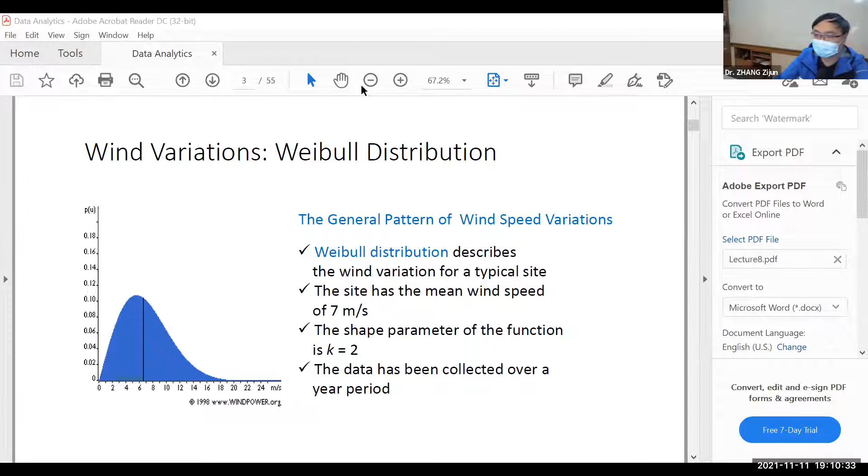Only paperwork allowed - what do you mean by paperwork? I bet you mean you will need to write down your answers on paper. Yeah, that's true. You will be given the answer book and you need to write down the solution. It's like what you have done in the past - the question paper will be dispatched and the answer book will be dispatched, and you need to write down the solutions on the answer book.

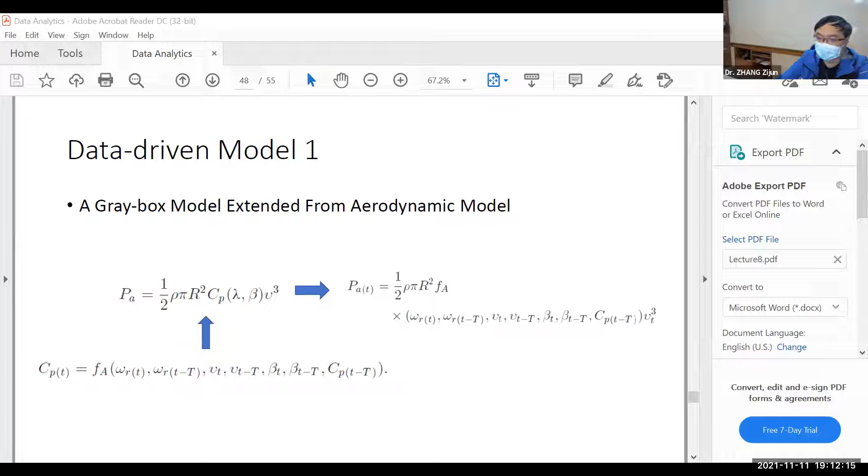Last time we stopped at using different machine learning tools to analyze the power curve, to do the power curve modeling. So we would like to incorporate such power curve modeling into the estimation of the power output of a wind power generation process.

We will see how the physics-based models gradually turn into physics-informed data-driven models and finally data-driven models. So the first one, on the left side, is the very classical aerodynamic model describing the wind power conversion process. Its components include a constant, rho which is air density, pi is 3.14, and R squared is the area swept by the wind turbine rotor, and this is the power coefficient, multiplied by the cube of the wind speed.

So this aerodynamic model is very clear. The only unclear part is the power coefficient, which is a non-parametric function describing the relationship between the power and the tip speed ratio, tip speeds, and also the blade pitch angle. So this one is not parametric, and we don't have its explicit form.

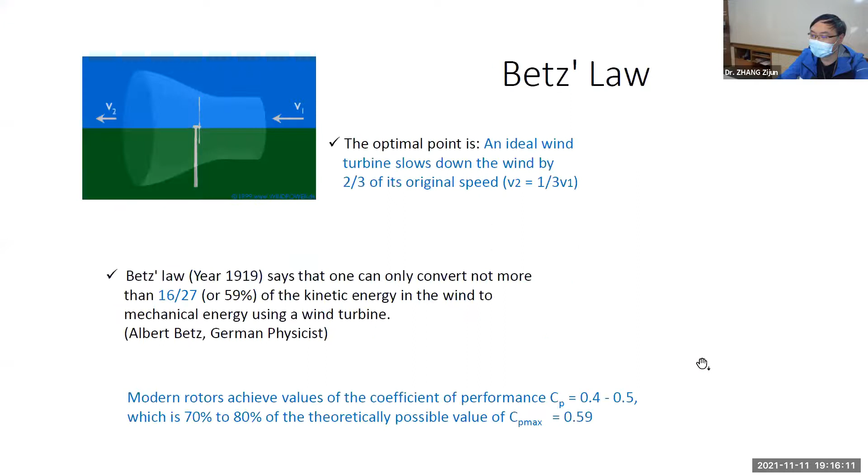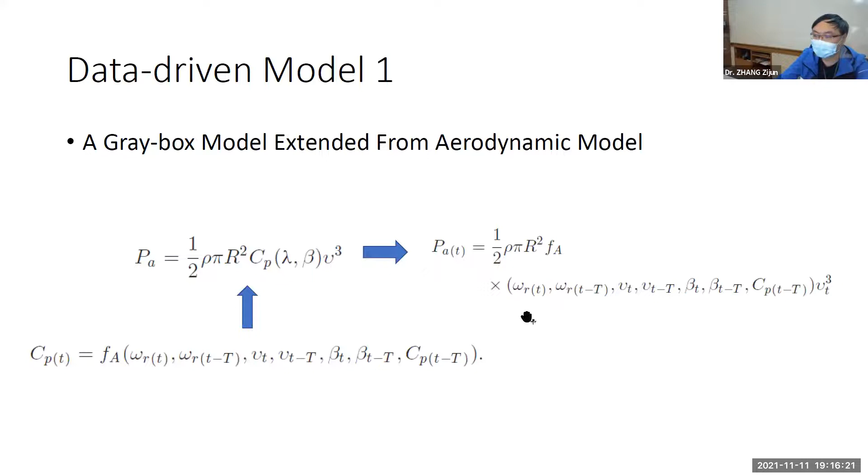So the uncertainty of wind speed we cannot control in the future, but according to the historical records, we can write down a Markov model to describe the state change of the wind speed over time. It can be converted to a static Markov chain.

It's expressed as a transition matrix of the wind speed, like after 60 seconds. So we will see that based on our data and statistical analytics, if the wind speed is at the low level, it is highly likely that it will stay at low level. And if it is at high level, it will highly likely stay at high level. But if it is in between, then you will find out its likelihood of staying at its own state will be decreased a little bit.

For example, if the wind speed jumps into the cut-in, higher than the cut-in state, it becomes 60% likely that it will stay at its previous state. Otherwise, other chances are like moving higher, or moving a little bit lower.

The most dynamic part is the wind speed at 7 to 8, 8 to 9, and 9 to 10 state, 10 to 11, 11 to 12. These states are very, very dynamic - they will have quick changes in the next time step.

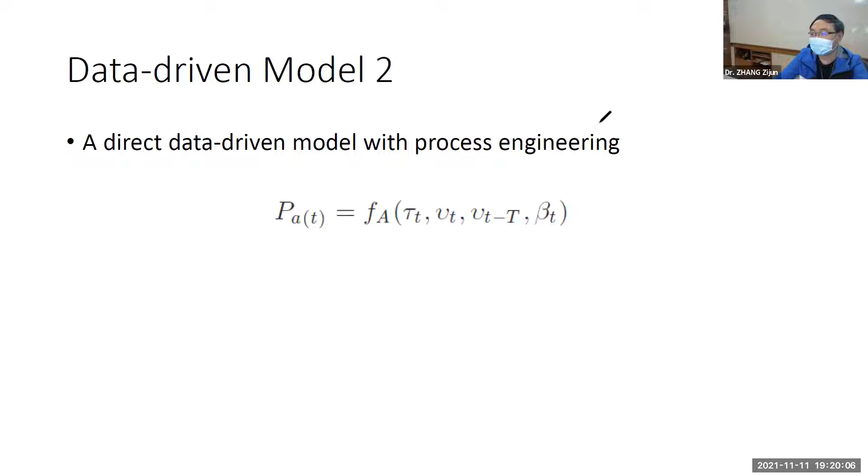If you have a power output PA with a function of T minus 1, then these historical outputs in terms of their relationship with the current power output indicate a kind of dynamic change. So this is dynamic, and a more complete model will include this, showing the dynamics of the system.

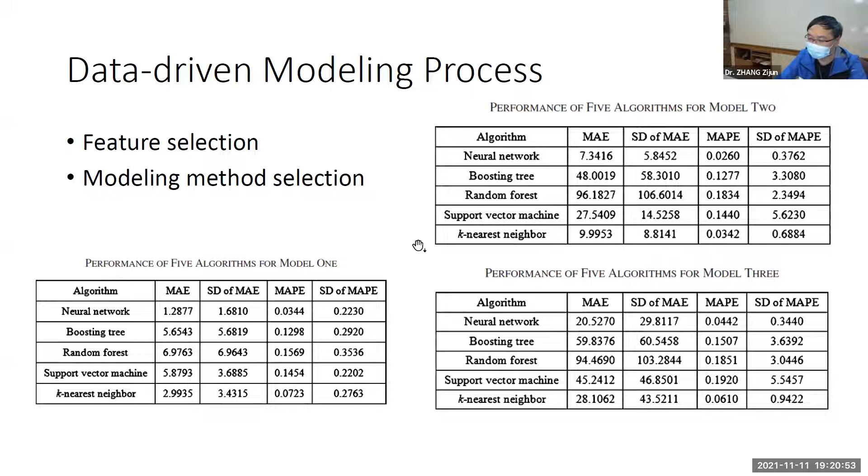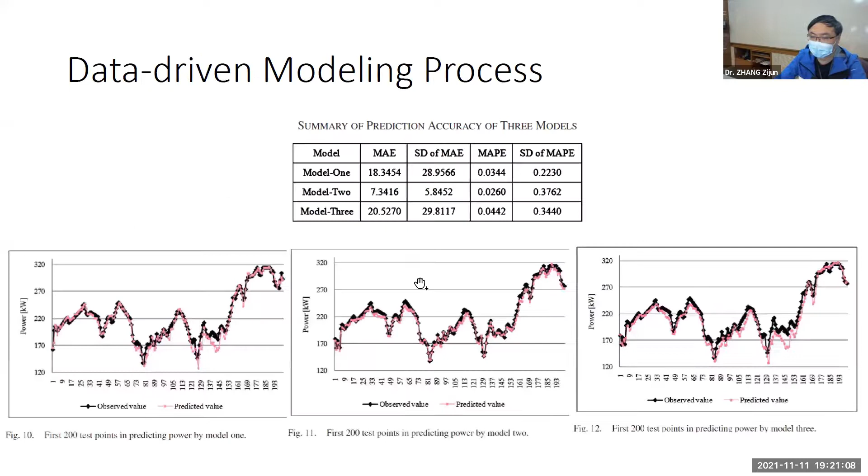Among the three modeling strategies, we figured out the second modeling strategy might be the most useful one. So we can actually do multi-period prediction by rolling forward observations, or directly using multi-step ahead future observations to build the data-driven model.

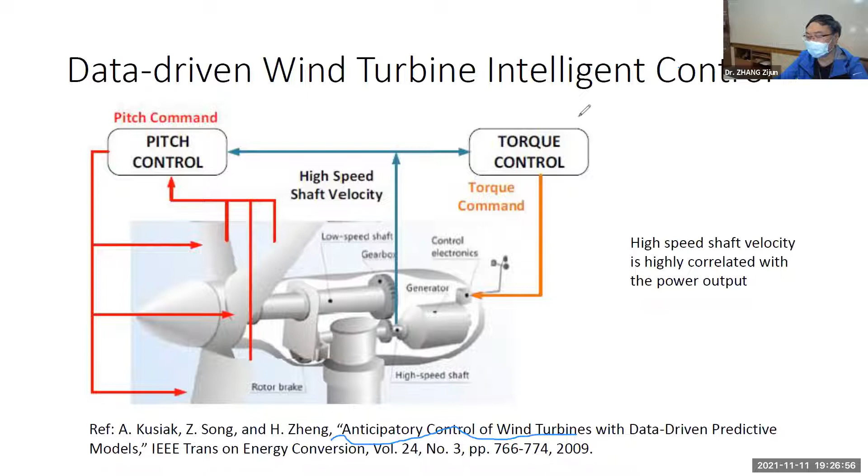So what we have learned in the past is we have the data-driven model. First, the advantage is it overcomes the assumptions made in traditional aerodynamic models - it directly fits the data, so it mimics the real situation. Second, based on the data-driven model, we are able to offer some anticipation capabilities, so we can study anticipatory control of wind turbines. That means we have future forecasting, and then based on the forecasting results, we optimize the process.

So mathematically, the wind power generation process can be represented by a triplet, x, v, y. Here x denotes a vector of controllable parameters, v denotes a vector of non-controllable parameters, and y is a vector of response parameters. If we give such kind of notation, then the problem will be simple.

First, we do the modeling. We want to build up the relationship between the response and the controllable and non-controllable inputs. So we have y equal to a function of x and v. The next step is very obvious: we want to estimate such kind of function f. So basically, it's a function estimation process and identification process.

So such kind of process also needs to rely on, traditionally based on studying system dynamics, and now from data.

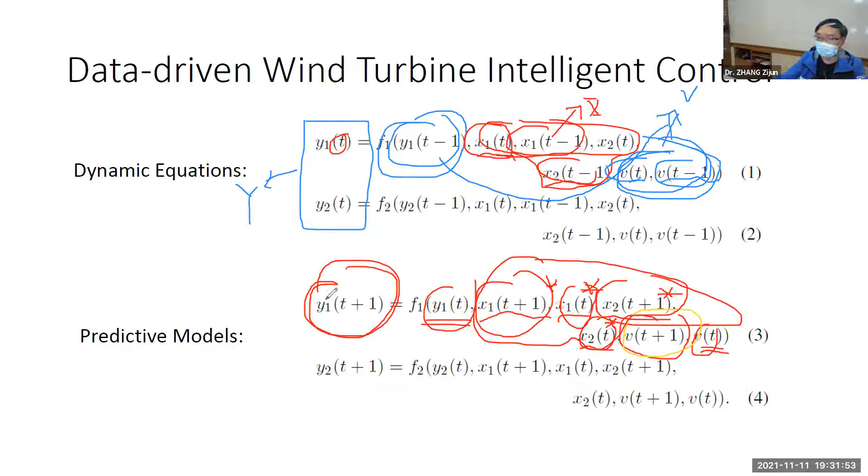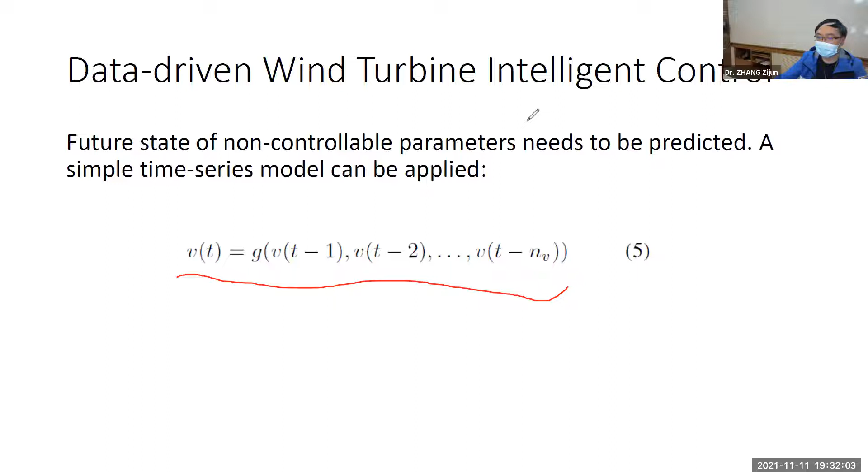Then we are able to determine a combination of the dynamics of the future control settings to lead to a kind of anticipatorily controlled or maximized power output in the future. So the wind speeds can be predicted via a time series model, as we have said.

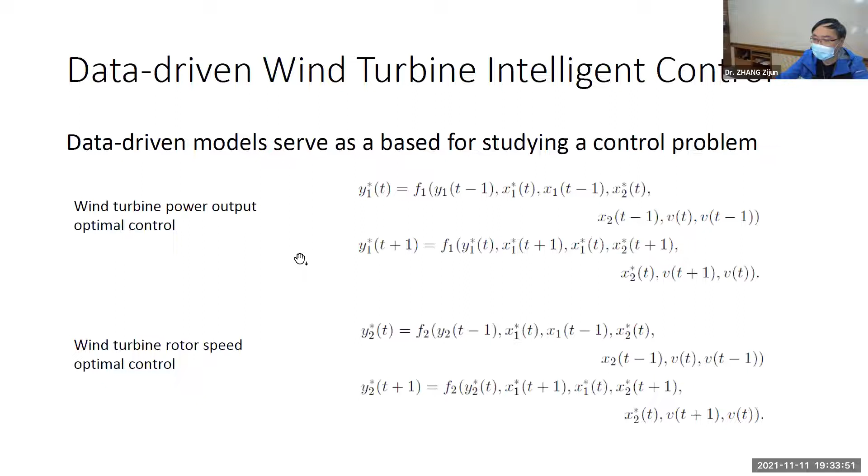But next we will talk about the reformulation of the objective. In this control, our objective is very straightforward: we want to maximize y1 and y2 at the current time and one step ahead. So we can do something: we can first do a linear combination of the power output we want to optimize.

And we know that the maximal capacity of the power output of a turbine is 1,600, which is according to the specification of this machine, the model of this machine after manufacturing. The manufacturers said its best performance will be 1,600. Then we use Y1T minus this value, Y1T plus 1 minus this value, and we get the difference. Based on such kind of setting, we can change a maximization problem to a minimization problem. We want to minimize the difference, that means we want to drive the power output to be as close as possible to its maximal capacity. So this is one trick of the problem transformation.

The second is we want the rotor speed to be changed smoothly. We don't want the machine constantly rotating at kind of 500 RPM, but at the next time it needs to be sharply increased to 1,000, doubling its rotational speed. That's not good, it will make very harsh changes to the machine and will damage the machine's health condition.

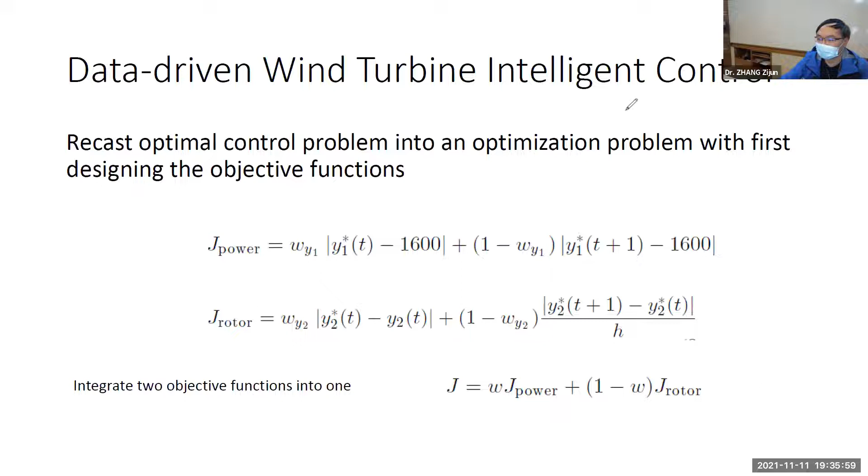We also need to refine the objective functions by integrating the estimation from the aerodynamics model. This is the incorporation of domain knowledge. For example, we know that the maximal capacity of a wind turbine power output will be...

This is estimated based on the aerodynamics model, the physics constraint. Why do we want to do this? Why do we need to set an upper bound? This is basically because the models we consider for estimating y are data driven, so they might have errors, and at some values they might have very misleading noise in the output, giving us ridiculous results. If we believe such results are true and put them into the machine, the machine will become very unstable. So we need to give a theoretical bound to the output of a data-driven model to guarantee that its results will be within a safe zone.

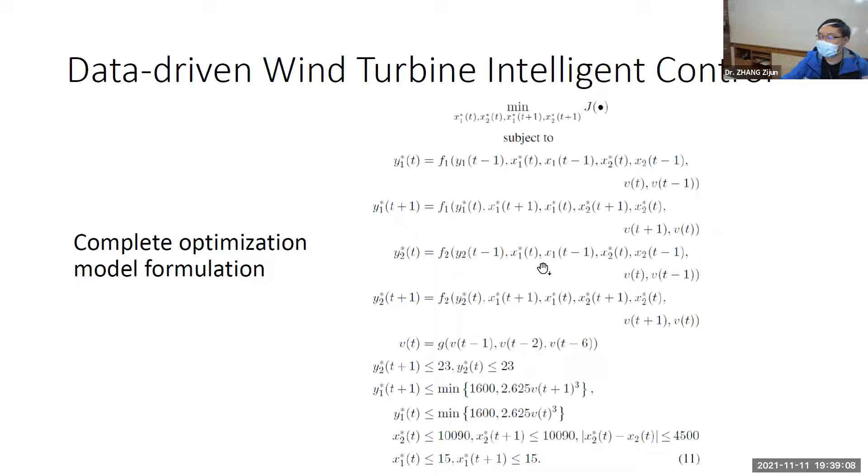We also need to consider a number of constraints, basically including the constraints for limiting the value of y, the output, and the controllable parameters. So this model is quite complicated and involves a lot of data-driven forms, and solving such a model is pretty challenging.

There are two reasons. One is the data-driven models are non-parametric and nonlinear, so it's very difficult to apply explicit optimization to get a closed form solution for that problem, and very difficult to find an existing exact solution method to address it. So we have to solve it with a heuristic search approach, which does not require any explicit form of the optimization model.

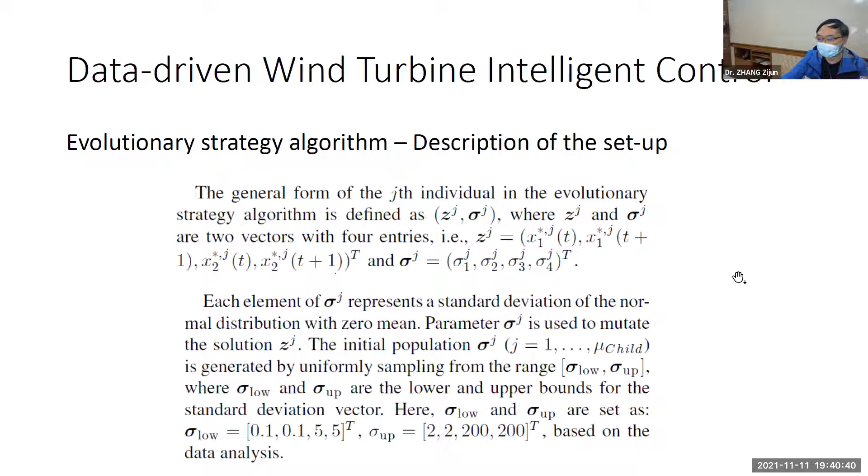In this paper, the authors apply the evolutionary strategy algorithm, basically a heuristic process. The general idea is you initialize a number of candidate solutions for the optimization model, and you make changes. The individuals are defined like this: Z is the candidate value of the controllable parameters, and sigma is the degree of mutating them, changing them iteration by iteration. Finally, you closely approach the best solutions.

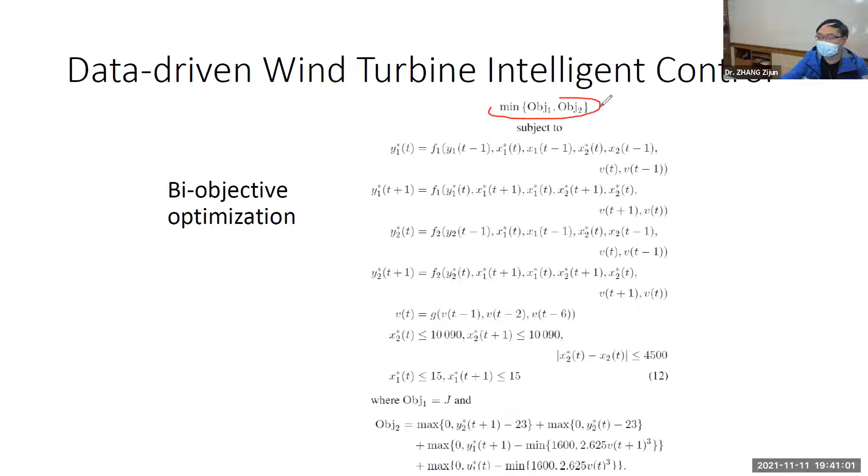In this problem, because the authors are using heuristics, they can change a single objective into a bi-objective problem formulation, determining the best solutions based on the Pareto frontiers of the candidate solutions. So they apply a strength Pareto evolutionary algorithm.

I won't explain too much about the evolutionary algorithm—if you have time, you can learn more. It's very simple, just some heuristics. For example, it's kind of a better version of exhaustive search. For a problem where you don't have its explicit form, the most stupid way would be to exhaustively try all possible solutions and find the one that works best—that's the exhaustive approach.

But the better approach is: how about I initialize some candidates, select a subset of solutions, and based on the better ones in that subset, make changes to gradually move them toward the optimal solution?

So if in this problem you have a set of candidate solutions and you want to make changes to them to do a kind of search of other solution space, the mutation process will be like this. You have the current iteration of solutions, you evaluate it, you find out it's probably good. Okay, then how can you change this to explore other solutions?

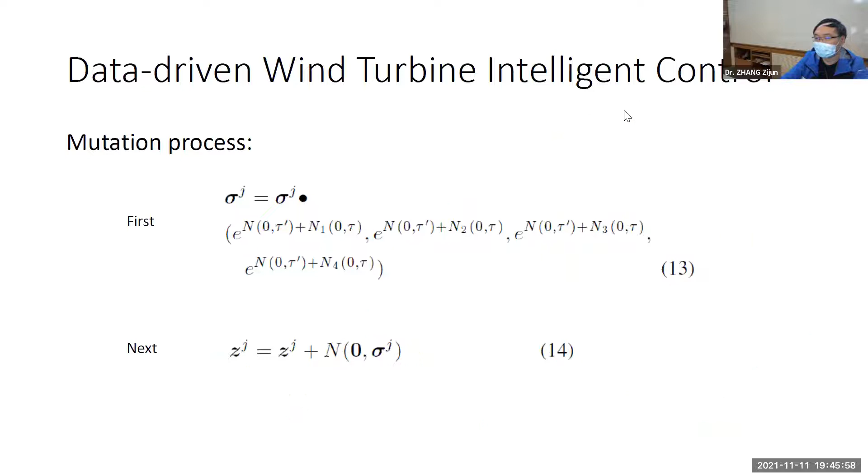So next you need to consider the recombination of the parents. It's just taking two parents and taking an average, or taking some parts of the parents to do a combination. All right, so we stop here, take a break, and come back after.

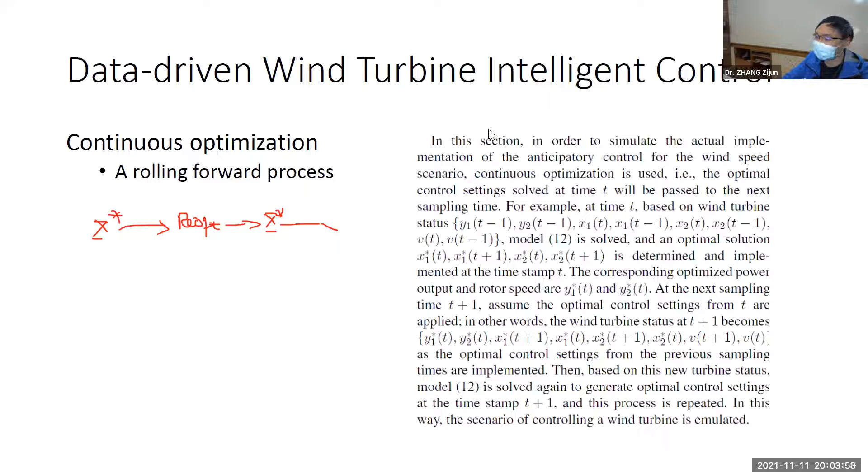Next we will talk about data-driven wind farm operational optimization. If we consider wind farm optimization, the unique contribution of the data-driven model is that we are able to model the heterogeneous characteristics among wind turbines in a wind farm. So what does heterogeneous characteristics of wind turbines mean? That means the different factors of those wind turbines.

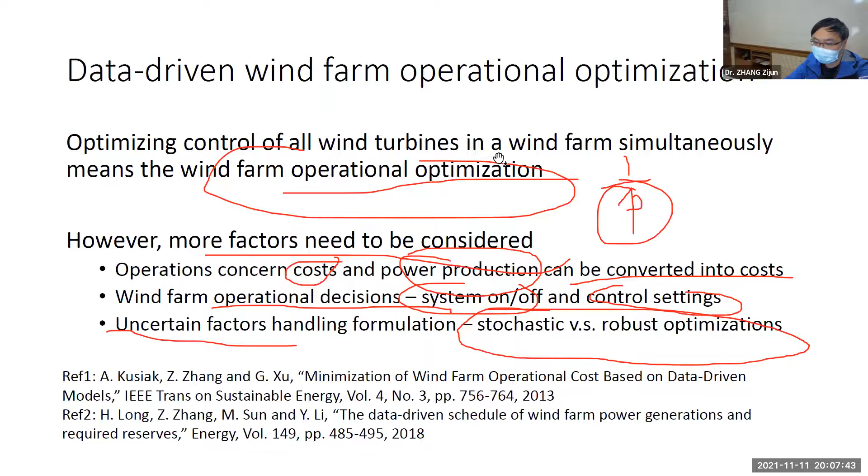So our operational decisions will include two types. The first is the binary decisions indicating the on and off of those individual distributed machines. And second are the control factors of those machines, if they are turned on.

So we have some definitions of cost that need to be considered. The first is the cost of operating a wind farm in power generation, which includes the power shortage cost. That means your power supply cannot meet the demand of the power grid. And the operations and maintenance cost - your machines might face problems, then you need to send people to inspect and fix those problems. Those are the costs. And the idle turbine cost.

The idle turbine cost is kind of an opportunity cost. If there is wind in the environment, but you didn't turn on your wind turbine to generate power, then you are wasting the chance of producing electricity and making money, right? So that's the idle cost.

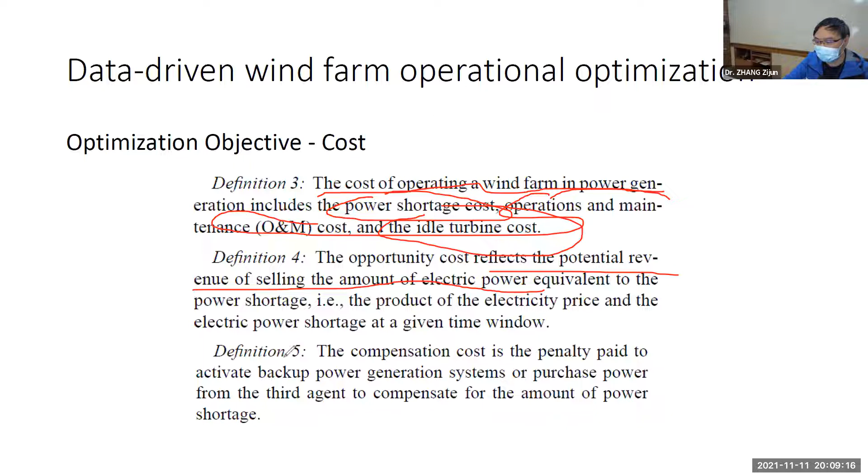So the opportunity cost reflects the potential revenue of selling the amount of electric power equivalent to the power shortage. And the compensation cost is the penalty paid to activate a backup power generation system or purchase power from a third agent. If you are short on power in terms of supply, you have to buy some extra from a third agency, or you need to turn on the backup power generation units, including your energy storage systems, to discharge power to the grid, or turn on the thermal generators to a higher speed level, to generate more power.

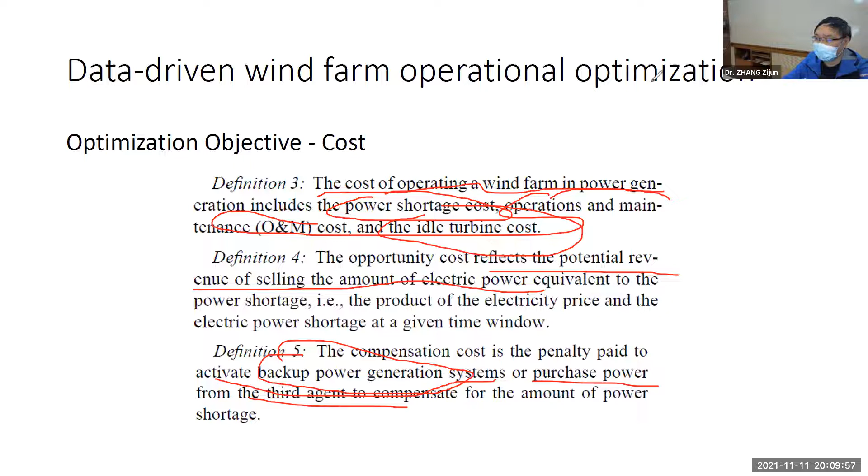So we inherit the previous data-driven power output model from previous studies. We use the control parameters and predicted wind speeds to estimate the power output. We make a simpler version.

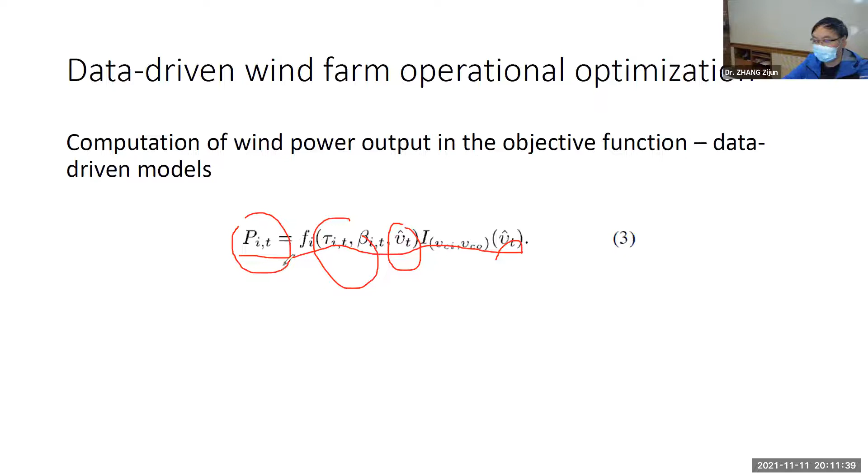So to better handle the uncertainty in terms of wind speeds, we can formulate a stochastic optimization version of this model. We take the previous Markov chain-based transition matrix of wind speed. We calculate the conditional likelihood of the wind turbine being in different future states, conditioned on the current observations. Then, based on the data, we can generate this kind of transition matrix of wind speed.

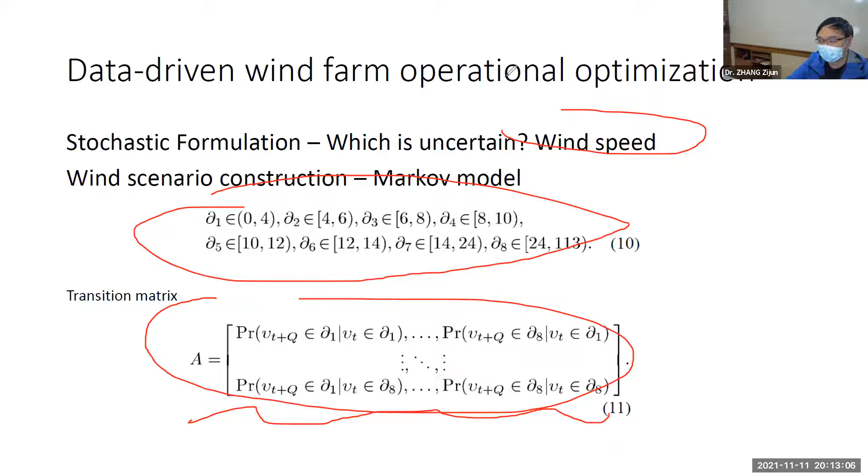Then we can multiply this conditional likelihood of the wind speed with the cost under that wind speed scenario, to get an expectation of the power generation.

Then we will find out these terms, and we can get an expectation of the total cost. Based on such expectation, we generate a more robust, more anti-risk decision-making in the wind farm operations decision-making. The previous problem formulation is a mixed integer nonlinear programming problem with data-driven components, which is very difficult to solve.

So we developed a new heuristic called migrated particle swarm optimization. We integrate or migrate the GA genetic algorithm operator to deal with the integer part in this nonlinear programming problem, and the particle swarm optimization part to deal with the continuous variables in the nonlinear programming. This introduces a kind of capability to escape from the local optimal.

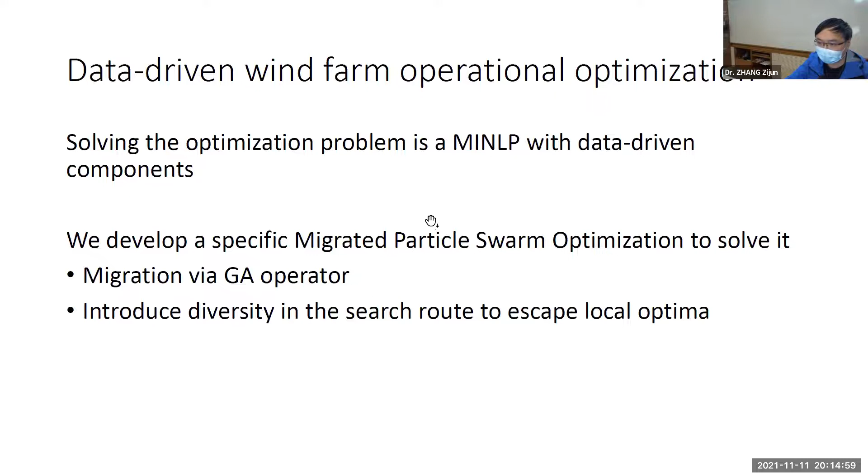So the previous one is talking about using stochastic programming to do the decision making in wind farm operations optimization. The thing is, we need to discretize the wind speed into a number of discrete scenarios and compute the expectation. But how narrow we should discretize the wind speed into those scenarios is a great problem, because if we divide a lower interval of the wind speed scenario, the computational cost will be pretty high.

So can we have a more flexible way of dealing with this kind of uncertainty, and have a problem formulation that can guard against this uncertainty while also facilitating computation? Then we study a robust formulation of this kind of operational optimization problem.

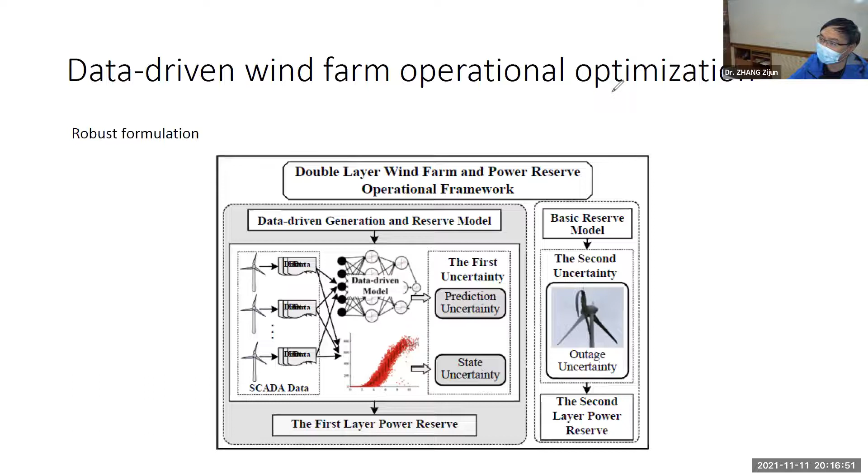In this problem formulation, we are able to consider more uncertainties rather than just the wind speed uncertainty. We describe the uncertainties in wind farm operations decision-making as involving two types, or two levels, of uncertainty. The first one is called operational state, which indicates that the wind turbine states will be degraded or changed over time.

So it will affect the efficiency of generating power. This kind of risk will be incorporated into the uncertainty set construction, and we call this part the operational state uncertainty. The second part is the power prediction uncertainty, which involves uncertain power prediction error.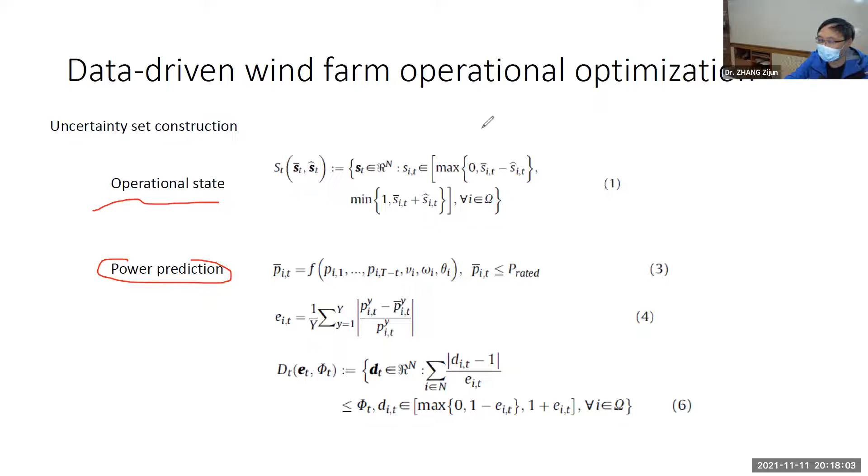So we integrated these two types of uncertainty and described the uncertainty sets U1 and U2. They are basically the same thing, but U2 introduces a kind of budget allocation factor, phi, to control our budget of uncertainty, which can be handled in this optimization problem.

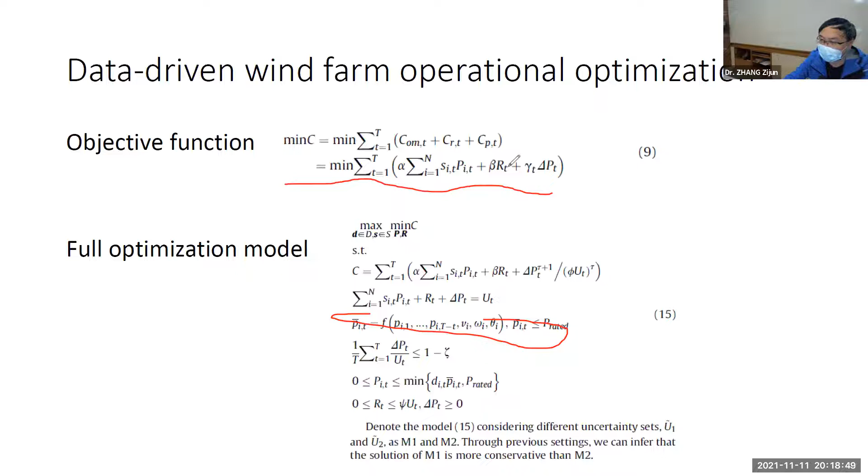Now we still do the minimization of the cost, but subject to the data-driven components and the uncertainty set formulation. To solve this kind of problem, we introduce two levels of heuristics. First, robust optimization is a max-min two-level formulation.

We first do the problem simplification: we relax the max part and study the minimization part first. Then we introduce PSO, the particle swarm optimization, plus barrier methods to solve this kind of problem, with a more analytical probability guarantee in the solution quality.

So the optimization part can be a little bit mathematical and difficult to understand. But next we talk about condition monitoring, which is probably a little bit more straightforward.

In these condition monitoring parts, we are going to introduce two types of applications. One is system condition monitoring based on SCADA data, which is numerical data. The other is condition monitoring based on image data.

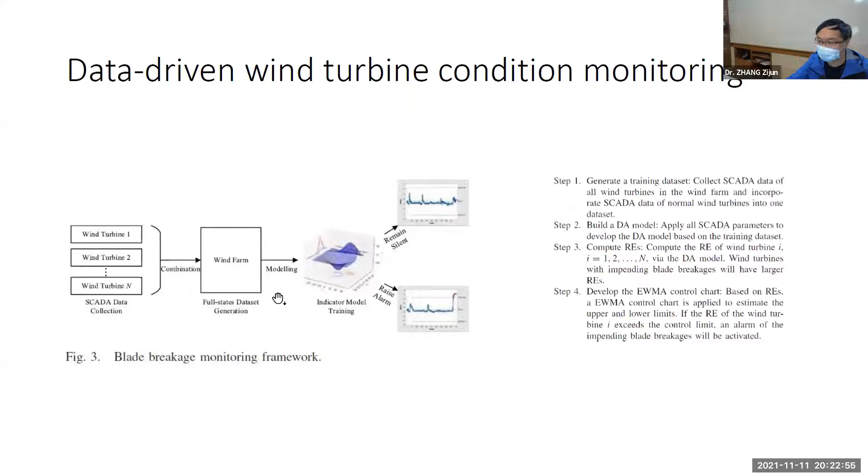And what we do is we think if that component has a health problem, although it is not measured, such kind of machine is a coupled system, its problem will be propagated to the value of other attributes in this system, right? Then that's why we're using the denoising autoencoder to derive the full mathematical mapping between all the attributes in the wind turbine and to do such kind of reconstruction.

Okay, so we're introducing a stacked denoising autoencoder to derive a health indicator. Our aim is to learn the mathematical mapping between its raw inputs and its reconstructed input. We hypothesize that there must be such kind of stable relationship between these two signals. So if it is in the normal condition, such kind of mapping will be stable and will not significantly change. But once the system has a problem or something very big is going to happen, then the whole mapping in terms of the mathematics will be changed.

So rather than directly measuring or monitoring the health signal of a wind turbine blade, which does not exist in the world, we then monitor the errors between the input X and reconstructed X. Such kind of error will further reflect whether the mapping between X and X hat is stable or not.

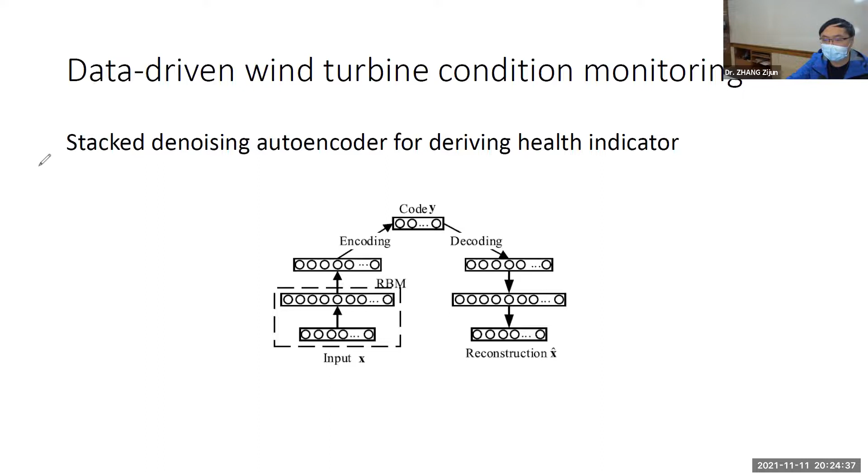So based on the derived reconstruction error as the health indicator, we apply the EWMA chart in statistical process control to build up the monitoring decision boundary for such kind of indirect health indicator. Then we will build up the decision boundary for monitoring.

And we tested turbines with normal conditions and turbines with blade breakage happening in the future. We find out we are actually able to predictively identify the potential failures a couple of hours ahead of its true occurrence, which will help the turbine receive an early alarm that it is going to have a disaster failure, so that the wind farm can prevent such kind of failure case from happening.

Okay, so this is condition monitoring based on SCADA data. So next we're going to discuss the condition monitoring based on image data.

This is an application we are studying using drones or unmanned aerial vehicles to take images of the wind turbine blades. We would like to, from the computer vision perspective, identify the cracks born on those mechanical structures to help with the routine inspection of the wind farm.

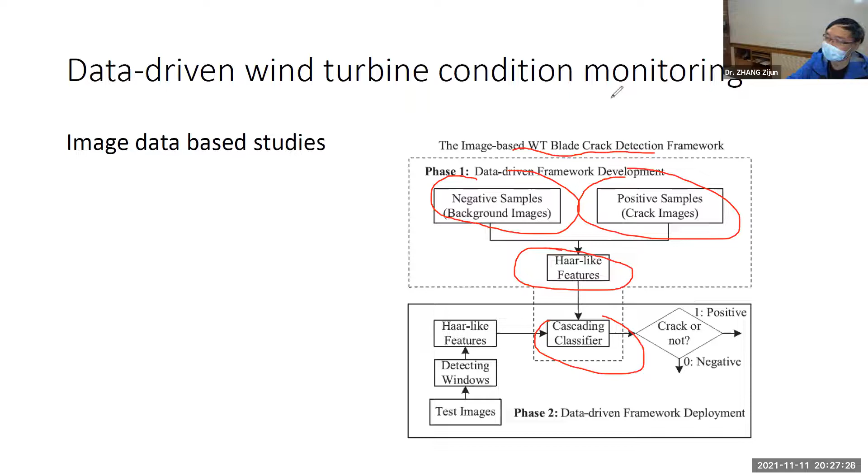This slide shows the Haar-like features. How does it look like? It basically includes different templates, a number of templates to do the contrast comparison of pixels in different regions, to extract different patterns in image data.

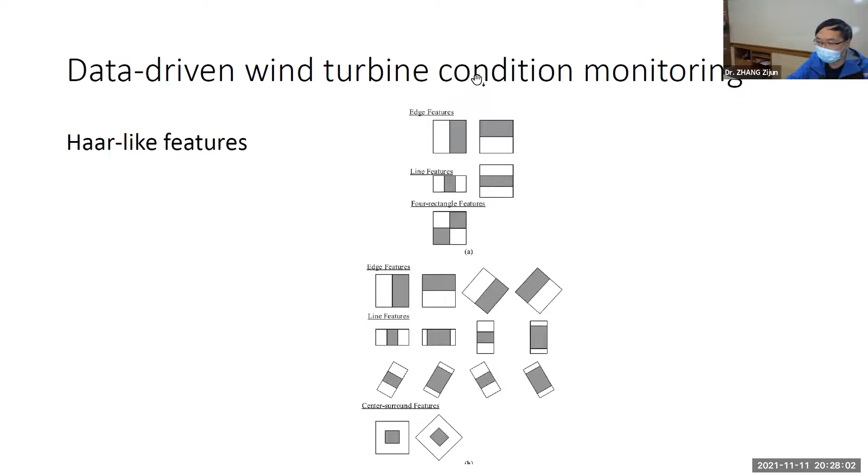So this is a cascading classifier. It is a very interesting architecture, a sequential decision-making process. It is composed of a number of strong classifiers, and each strong classifier is a number of ensembled weak classifiers. So it adopts the overkilling strategy.

So if we fit the Haar-like features into a classifier and it says it is not a crack, then we save the efforts of the following steps—we directly say it is not a crack. So we recognize an image contains a crack only if the data can pass through all the decision-making stages. Then we say it is positive.

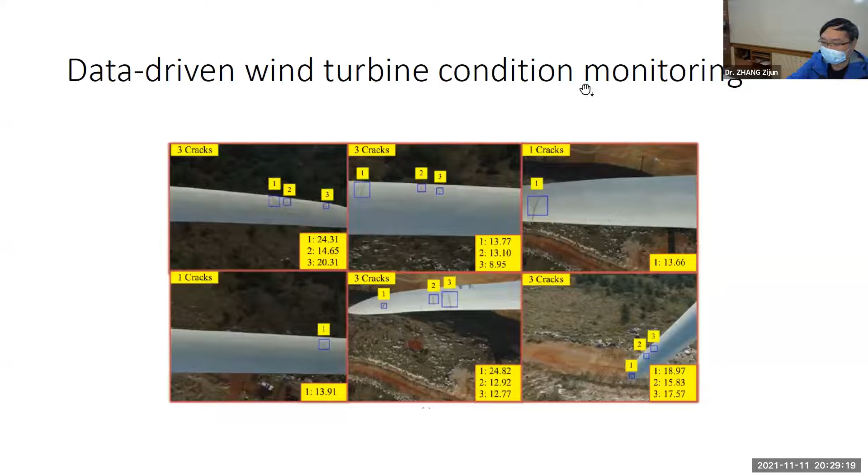So this algorithm can be executed online, and its performance is great. We can show different cracks we identify through the wind turbine, even very tiny ones. Okay, so that's basically the wind energy application discussion finished.

So next, we're going to go through some of the building energy saving applications.

If you guys apply for the kind of GreenAI challenges organized by the EMSD Hong Kong, then you are actually doing something closely related to these slides. We are going to explore the domain knowledge of what is the major energy consumer in a building, how this is dynamic, and how we are going to model such kind of system and doing optimization.

So first, let's look at the building energy consumer, major building energy consumer nowadays. If we exclude electric vehicles, most commercial buildings or skyscrapers are equipped with a very major component called heating, ventilating, and air conditioning system, abbreviated as HVAC system. This system has the function of heating in the winter.

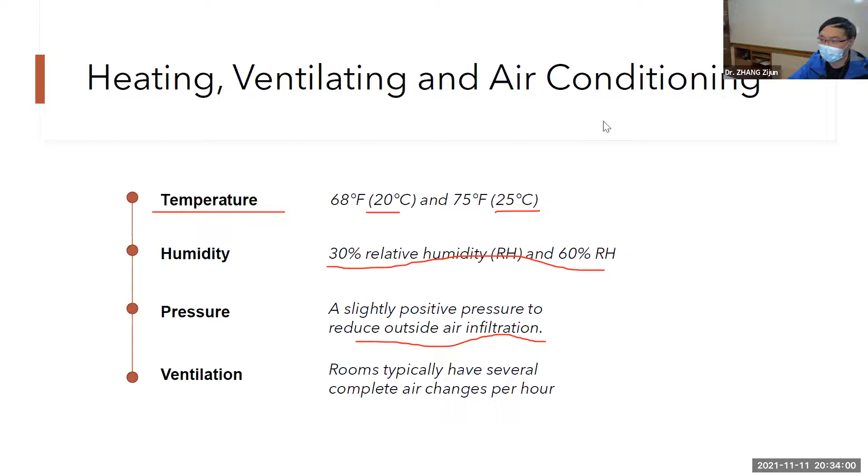For the HVAC system, we have a number of major components. The first one is called the mechanical room - typically located here. You can find that every skyscraper or tall building with an HVAC system has such a mechanical room. In this room there will be boilers - not in Hong Kong typically, but in other areas; probably some places in Hong Kong have heating capability and thus boilers. And chillers, definitely, for cooling air, and pumps and heat exchangers.

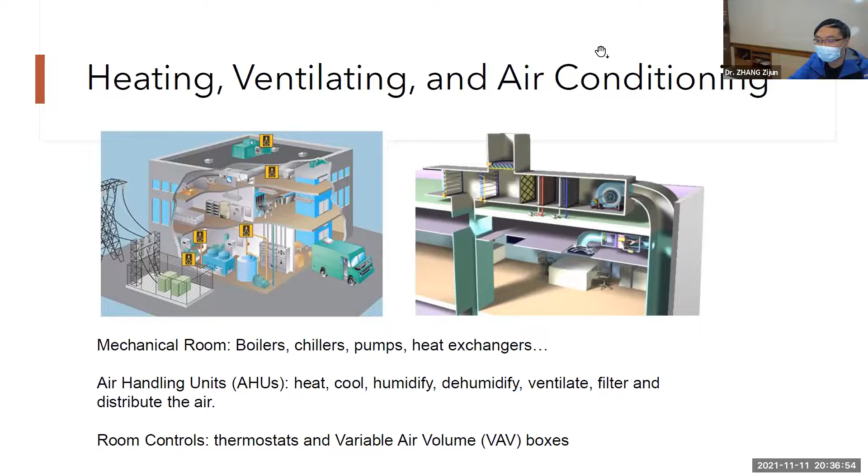So basically, this is the working flow of a heating system. You have a boiler. Water comes back from the air handling unit, you heat it in the boiler, and the water flows through the air handling unit. It has a hot water valve to control how fast the water flows through the pipes, and how fast the water circulates. Then you have a hot water coil, which does the heat exchange with the air in the room to heat the air.

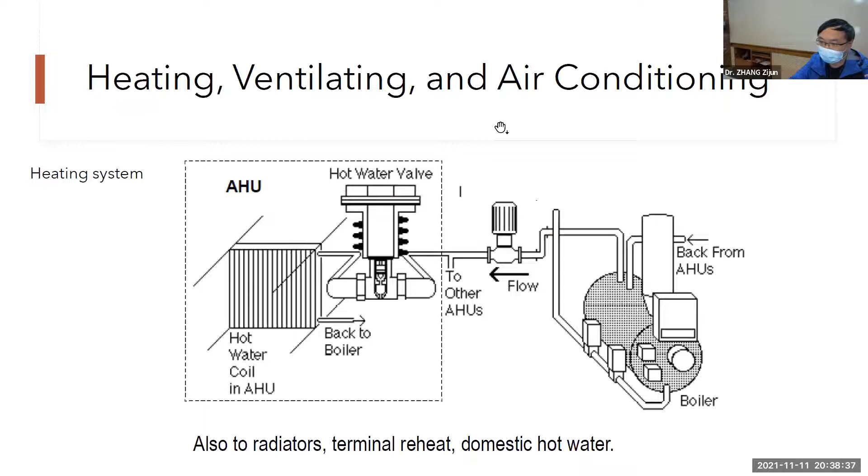So this is a typical structure of an air handling unit on the floor. It's a very big guy. So what does the air handling unit do? First,

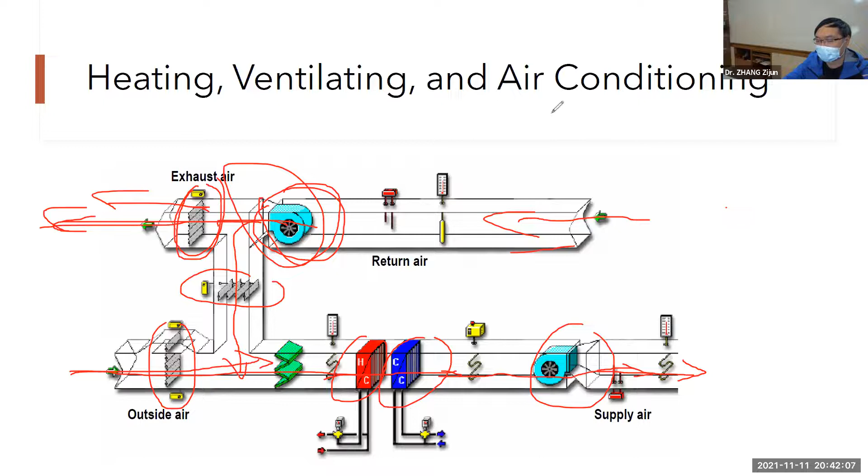This is also called, there are different operating strategies. So basically in the summer, we will typically turn off this air exchange, make it a minimal level, to minimize the air change, because in the summer the outside is very hot. We typically use the economizer, just doing internal air circulation. But in the winter we will take a little bit more air in.

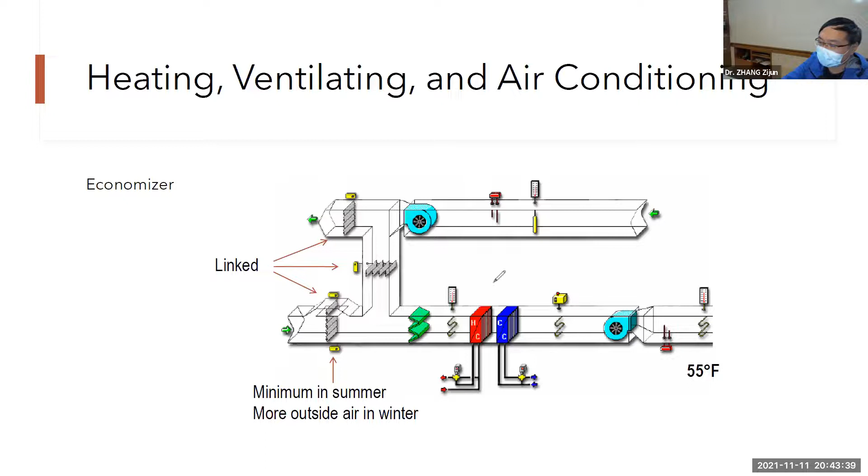The next thing is the VAV box, variable air volume box, in each of the rooms. Besides the heating and cooling coil, which is the major temperature controller in a building, in each room you also have a thermostat to adjust your room temperature. So all the temperature control is centralized based on the HVAC system. Then how can you determine your own room temperature? This relies on the VAV box, the variable air volume box. You have air from the air handling units, and a damper to control how much you take in. Then you have an air diffuser. It's not here, but in some offices you will see such an air diffuser. We do have some, if you look at the top.

The next thing is it can use electricity to reheat, or for example, if the temperature is too high, we can increase the air volume, using the fan function to make the room temperature cool down. But if the temperature is too low, then we have a coil using electricity to reheat the air to make it warm.

So every HVAC system has a condition monitoring system to record its data. This is kind of an interface showing how the data recording works in an HVAC system.

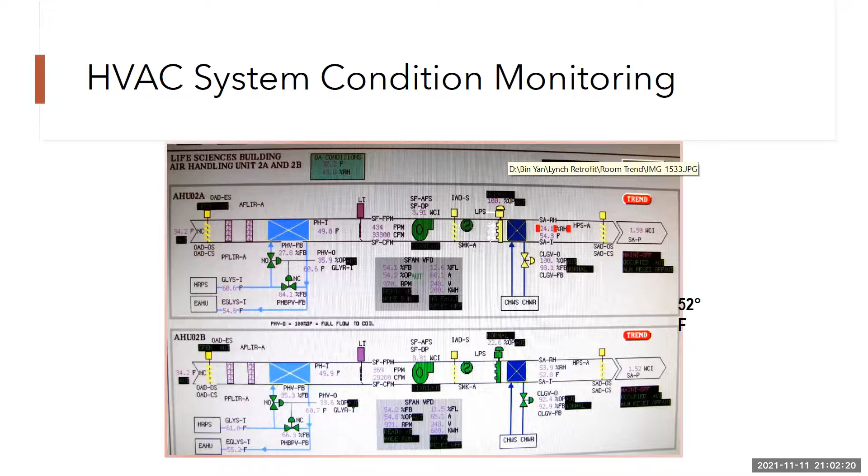So we have talked about the physics aspect, how the HVAC system is operated, and then based on the data collected in this condition monitoring system, what data scientists can do in conducting HVAC research. We start from learning the domain knowledge, analyzing the system from the physics side, conducting experiments for collecting data, and next going into data analytics. So basically we can better model the HVAC system using data and do a more accurate, more adaptive optimization of its performance.

So first, let's look at a physical system of HVAC research in the first paper. Here we are going to introduce 4 papers.

In the first paper, it studies an HVAC system in charge of the heating and cooling jobs in this space. This is actually an energy research center space, and it has 2 classrooms and 2 parallel air handling units, mechanical room, and it needs to charge 1 computer center, 1 office, 1 display room, and the media center.

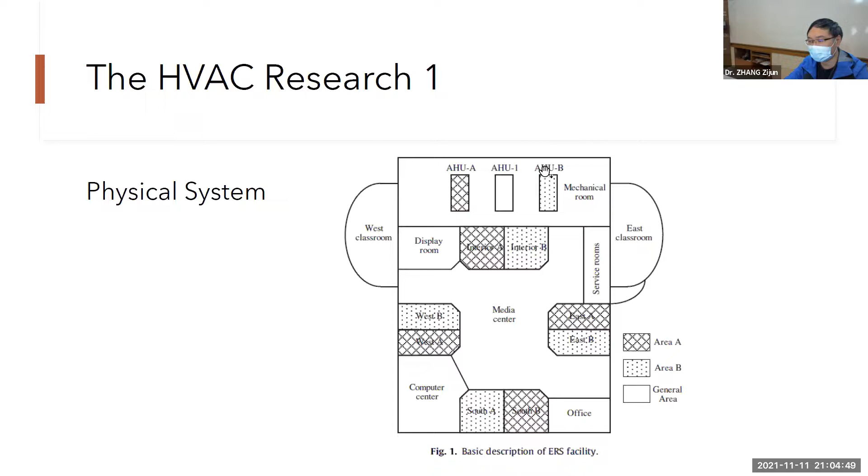So basically we are using this setup so it's able to do a parallel comparison. We have interior A and interior B, West A, West B, East A, East B, and South A, South B - 8 rooms charged with 2 same model air handling units, A and B. We're collecting data from both air handling units and doing data-driven research to optimize the performance of one, testing it in parallel, comparing it with the other traditionally controlled air handling unit to see the improvement.

So first we do design of experiments, because the thermostat's response is very slow, and traditionally people don't prefer to change the settings of the HVAC system control. So if you look at traditional condition monitoring system collected HVAC data, they don't bring much value because their values seldom change - you're facing different columns of almost constant numbers. So they aren't valuable for research.

So we actually first design an experiment to help the operator change the settings of the HVAC control, to collect more data describing the change of its dynamics over time.

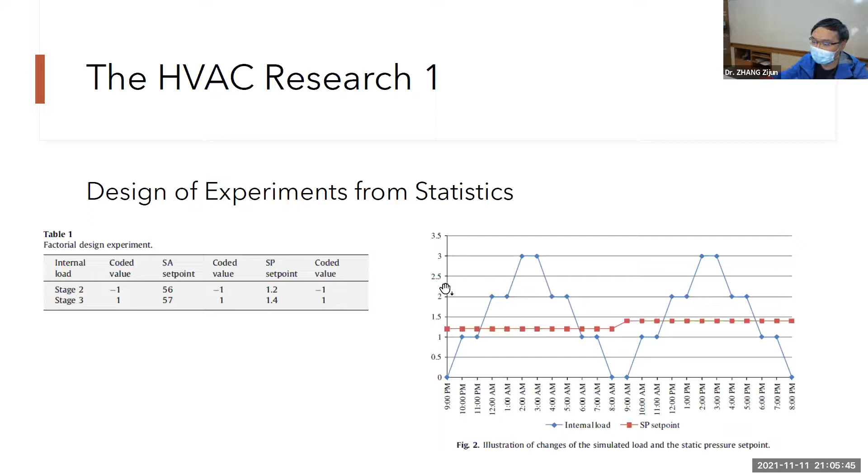Then we do the data collection. We collect 3 data sets: one data set is utilized to do parameter selection and algorithm selection, the second one to do training, and the last one to do testing.

So to model one HVAC system's energy consumption performance, we're using a boosting tree to select the most important features affecting the energy consumption of that HVAC system. Important features selected include the chilled water temperature, the solar normal flux - that's the outside condition, outside air temperature, cooling coil entering air temperature, and so on.

This indicates that the system is operated in summer, so mainly we consider the energy consumption in the cooling process. The energy consumption is definitely decided by 2 parts: one is the outside condition, and another is in-room thermodynamics.

So we consider those important parameters as the inputs, and we divide them into two chunks. One is controllable - one set of parameters that are controllable, including the internal loads and supply air temperature set point.

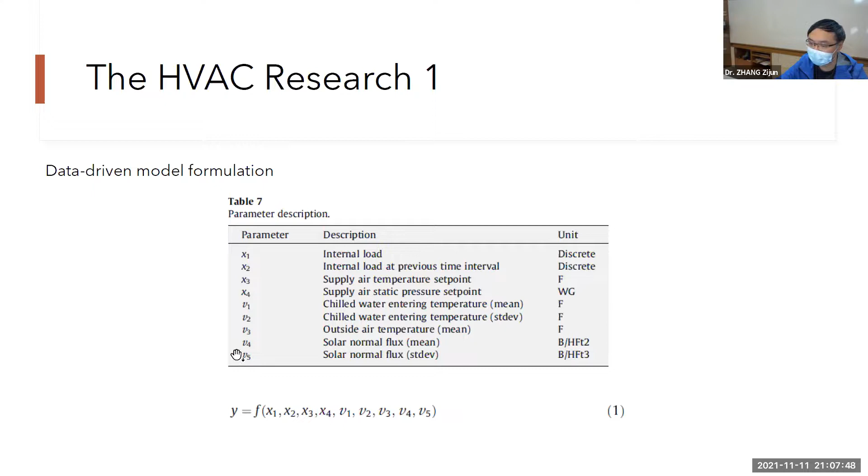So internal load typically reflects, for example, how many occupants are in a room, whether the lighting condition is high, medium, or low, and so on. Supply air temperature set point and static pressure set points correspond to the cooling control. And you have other related in-room cooling and outside temperature conditions.

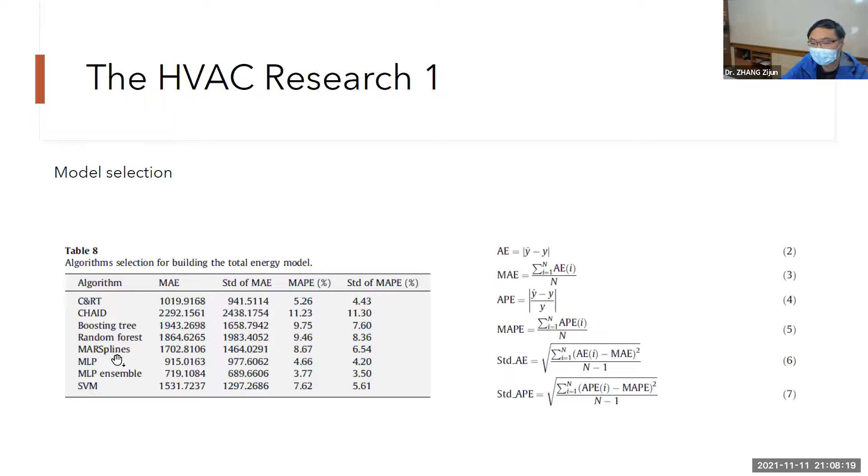We try different types of regression algorithms to map those input parameters to the energy consumption of the HVAC system. You can see we considered some regression tree models here. We consider a number of attributes to measure the performance of that model, and we find out the multi-layer perceptron ensemble actually performs best in such energy consumption estimation.

So we actually do individual subcomponent energy consumption modeling - we estimate the chiller energy consumption, the fan component energy consumption, the pump energy, and reheat energy consumption, and develop corresponding data-driven models for those parameters. This is the visualization of the results, and you can see the estimation is pretty accurate.

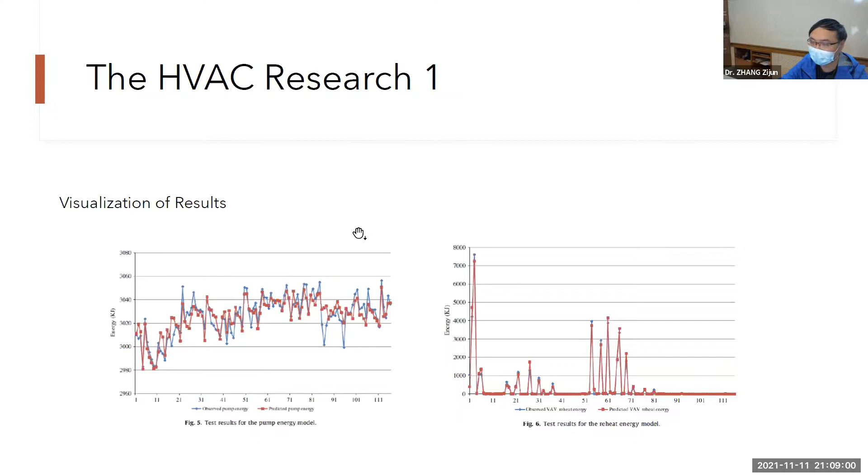Based on these 4 types of energy consumption models, we do an optimization model formulation. It integrates the 4 types of energy consumption model as the objective, and does control of the controllable parameters via heuristic search. We apply the particle swarm optimization algorithm.

Here it shows the energy saving. We can save some room in the energy consumption, and also the settings we recommended. We recommended more variable settings than the traditional, very stable static settings. We find that could result in more energy savings.

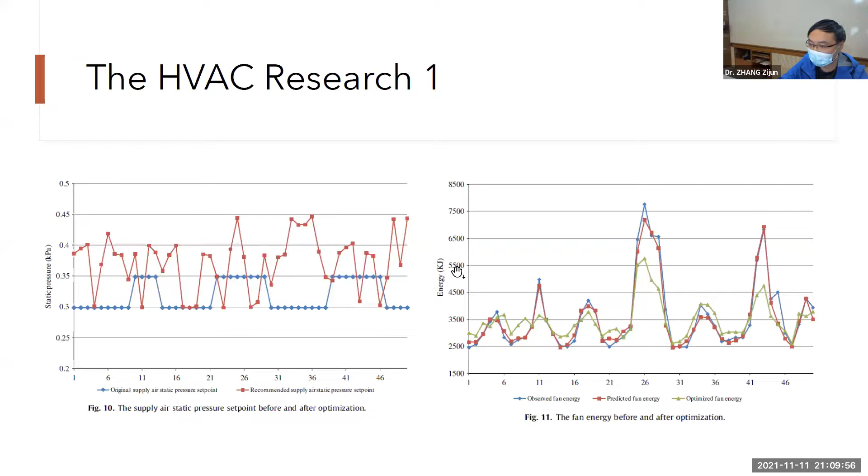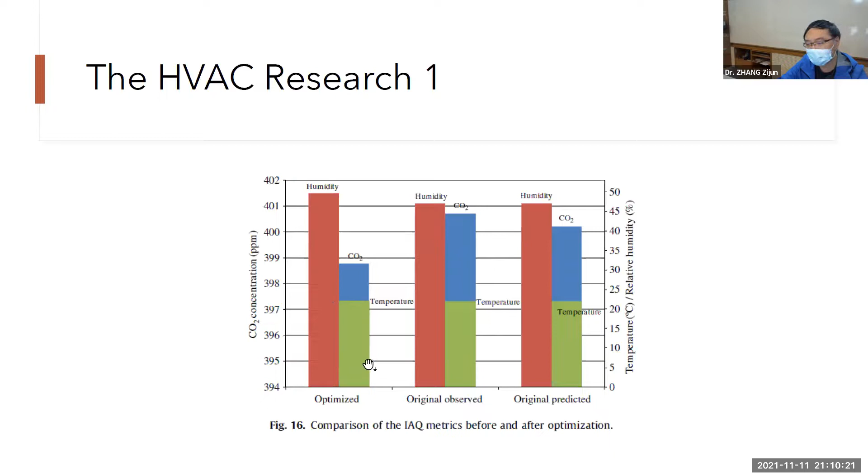This is the comfort condition, the settings of other components, and also the energy consumption of the fan components. We do a bar chart to compare the energy consumptions of different components and their corresponding comfort conditions. We find that after optimization, we actually don't lose much in comfort conditions - slightly increased humidity, temperature almost the same, and a lower CO2 percentage.

So the first work is related to the energy consumption minimization of a HVAC system via data-driven model. And the second research refers to the chilling process optimization.

First, we consider a very important ratio, called chiller part load ratio, which is between the chilling quantity and the chilling load, and also the chilling contribution. The power and the chiller part load will traditionally be described as a kind of polynomial form, based on such ratio with a square and cube term.

And the cooling load is described as here - this is also the physics expression, the temperature difference multiplied by the mass and multiplied by the coefficient. We can actually do a data-driven approximation of such cooling load process.

We build up 3 objectives based on the data-driven model to describe these 3 chillers in a chilling plant. It includes three groups of parameters: one is the dynamic states, the historical records of the chilling and energy consumption, and also the controllable parameters as X and non-controllable as V here.

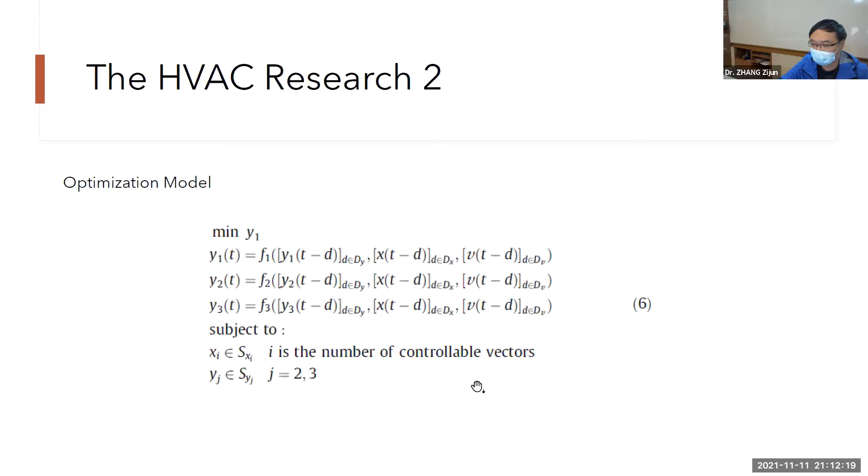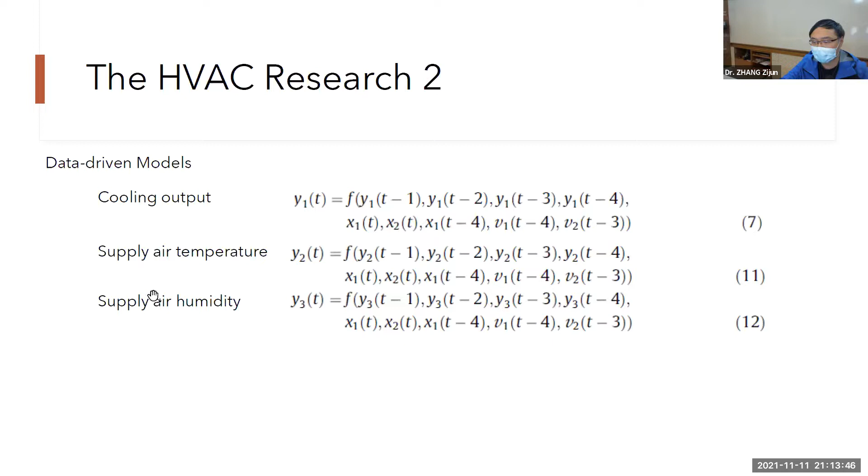So the 3 data-driven models include: one is cooling outputs, which is the estimation of the cooling load. It includes its past cooling load records and a set of the controllable parameters, including the chilled water valve position in past historical states, and also the supply fan wind speed. And the supply air temperature and humidity are the second and third objective.

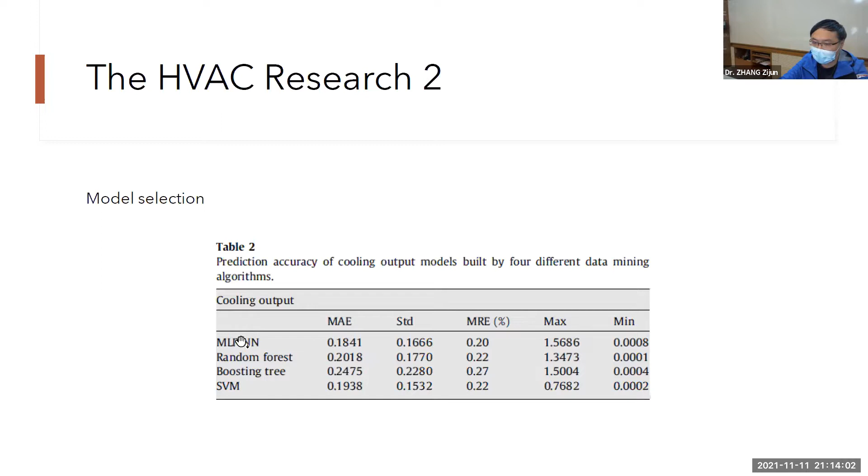For modeling the relationship between the targets and the inputs, we apply a number of machine learning algorithms here, and we find that the multi-layer perceptron NN is the best. This is the visualization of the model accuracy - we can see that our models can do very accurate estimation of the targets.

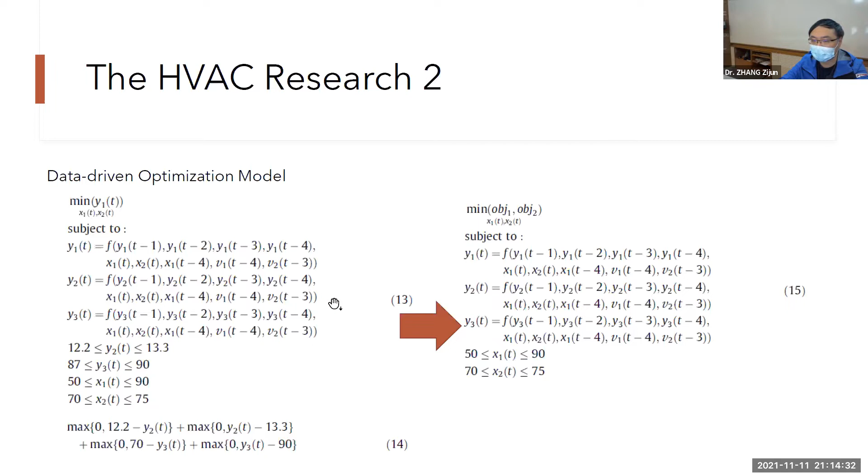Then we do a similar optimization model formulation, considering the 3 data-driven models as constraints. We reformulate it as a multi-objective optimization problem and apply heuristics to solve it.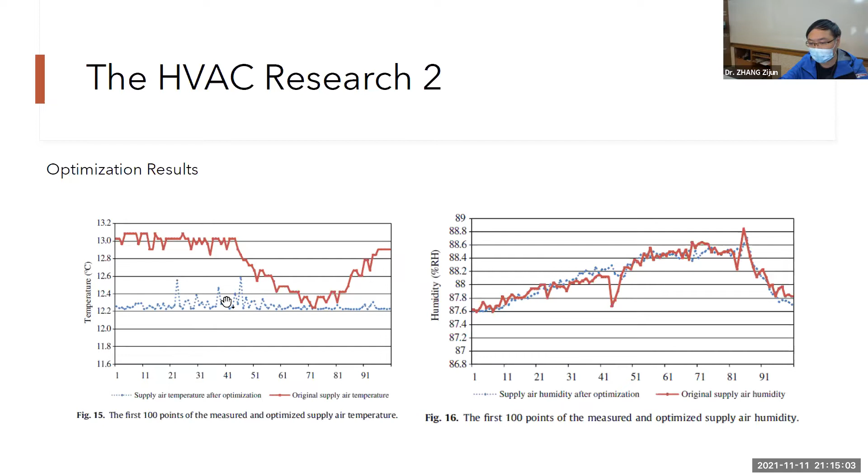This is the air temperature, the original air temperature, and we can maintain it at a more stable level. And the humidity, we maintain similarly.

So the previous discussion covered cooling load modeling and energy consumption minimization. Next we talk about the heating part, the steam load modeling. So what needs to be considered in steam load modeling?

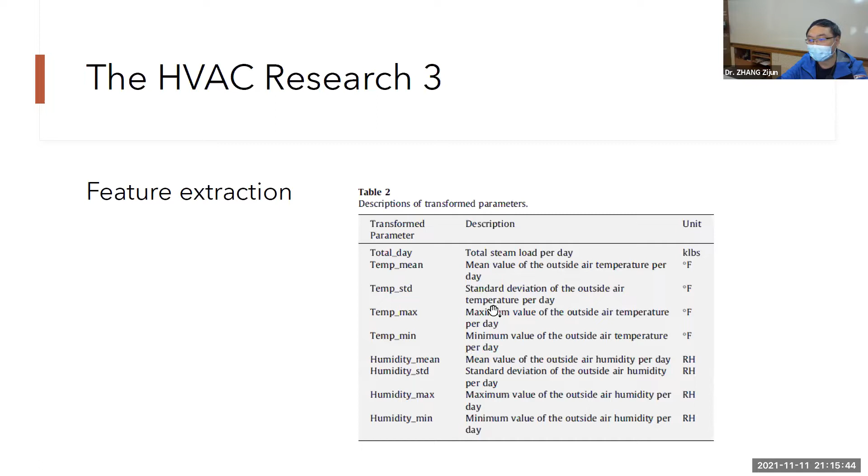We consider the total steam load per day measured, and temperature - mean temperature of the outside air, standard deviation, and the max and minimum value of the outside air, and also the humidity.

We do the correlation coefficient among those parameters, as well as using a boosting tree to measure their importance from a nonlinear perspective.

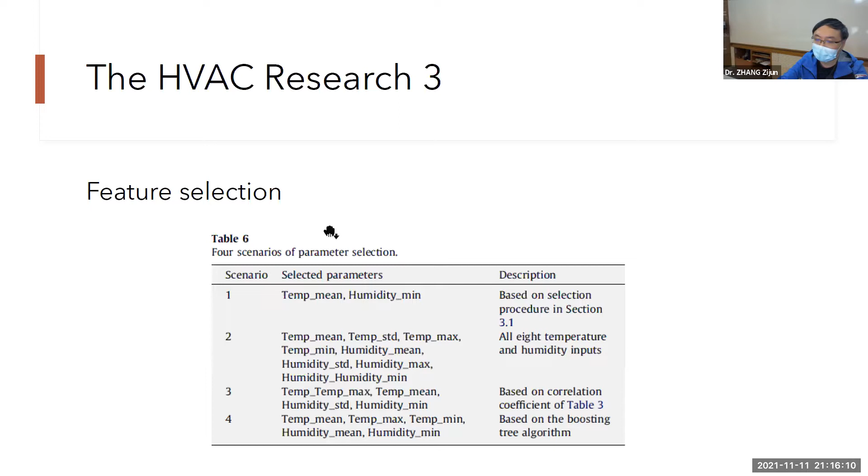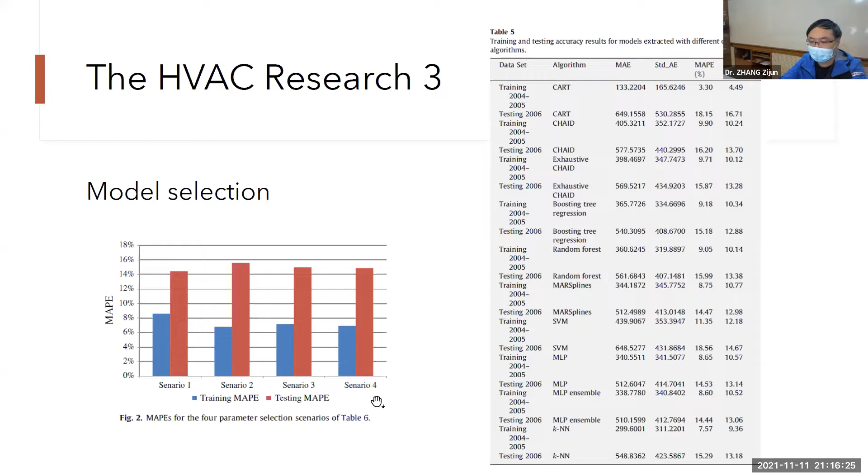After doing feature selection, we actually consider 4 scenarios of feature selection, based on different seasons - scenario 1, scenario 2, scenario 3, scenario 4. We find that each season, the model will have different dynamics and needs to select different features for developing the model.

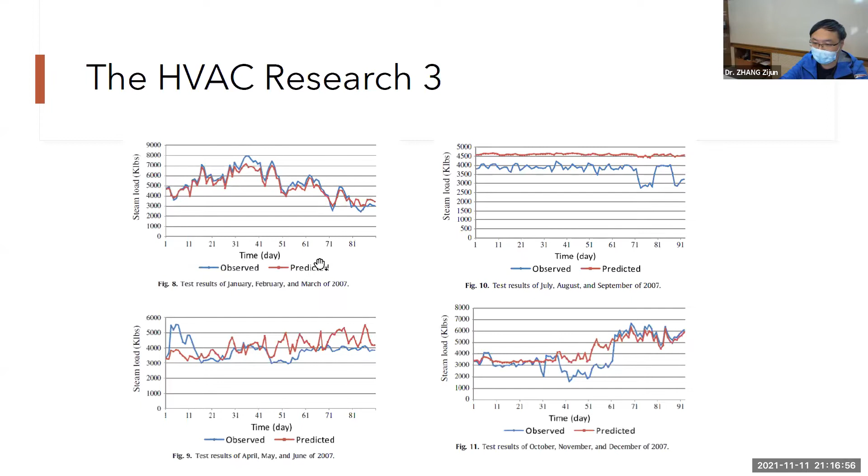Based on each month, we also do the modeling to see whether it can be further improved. We develop the MLP ensemble model, which offers the best performance. This is the observed and predicted value of different parameters, including steam load in different dates and different seasons.

The last research in HVAC systems is about the modeling and optimization of the chiller plant. This includes the operating of the chiller plants, turning them on and off, and the control settings of the chiller plants.

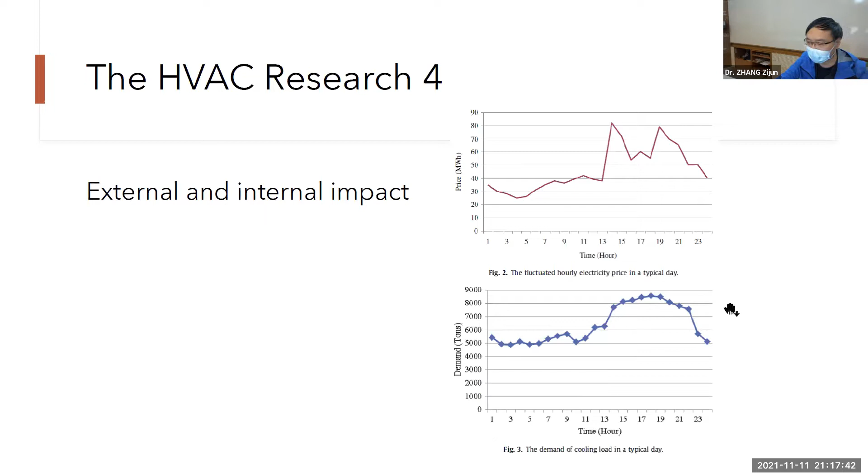We consider two types of factors. One is the electricity price fluctuation over time, because we consume electricity and different prices of electricity charge become important. The second is the demand of the cooling load on a typical day, which actually follows a similar pattern.

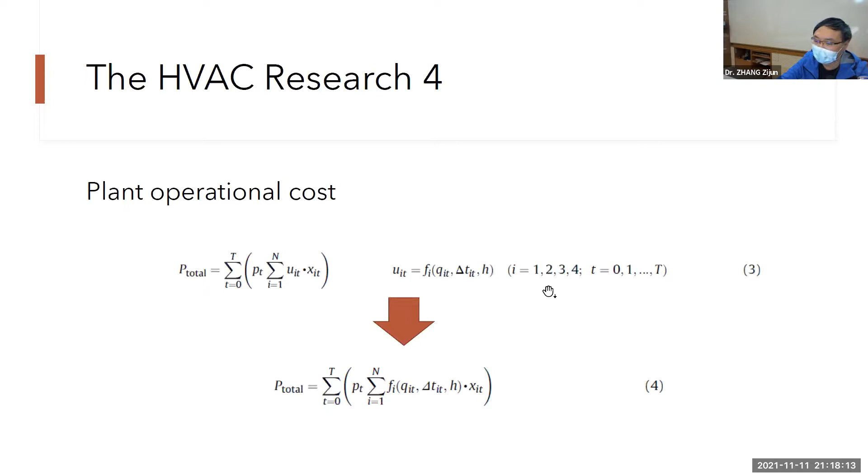The plant operational costs will be estimated based on the power consumed multiplied by the load estimated. X is a binary operating parameter including on and off. PT here is not power consumed, it's electricity price. Then we can calculate the total cost of operating the chiller plants.

Here we have 4 chiller plants with different capacities of chilling water process. The first and second can handle 3,000 tons, and the third and fourth can handle 2,577 tons. The parameter names of those chiller plants are presented here, including the cooling load produced, the power consumed, and the temperature difference between the condensing water.

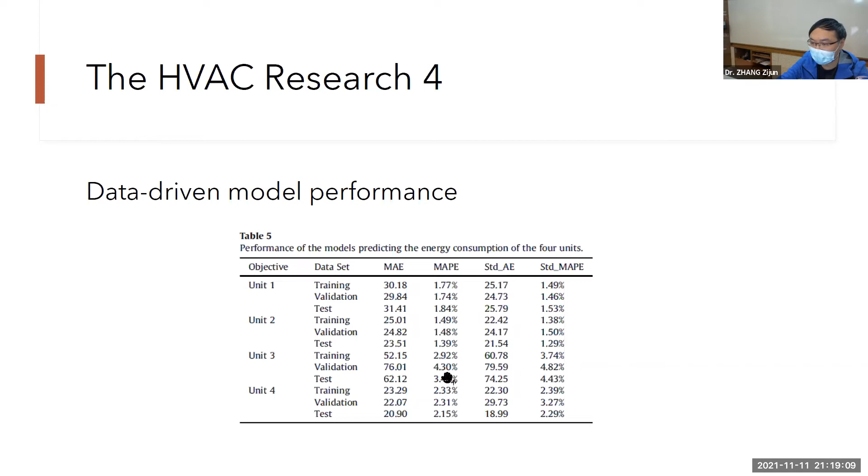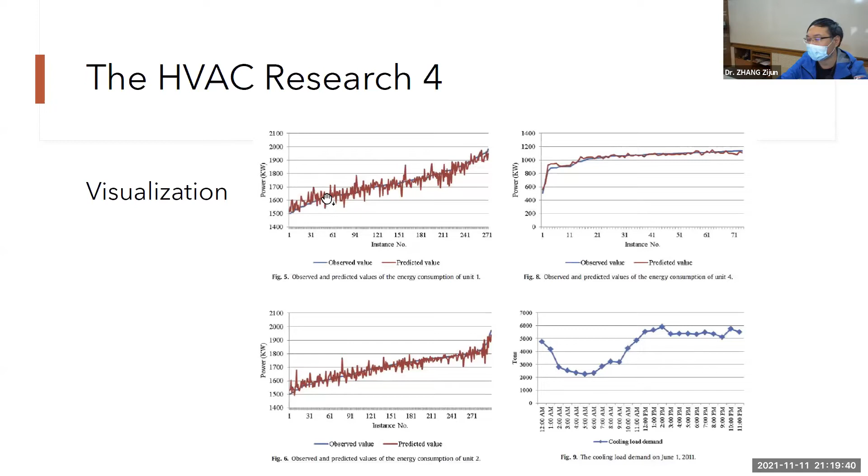Then we do parameter selection and modeling for each of the chiller plants and compute the error of the data-driven modeling performance. Then we formulate this optimization model and introduce a 2-level intelligence algorithm to solve such kind of non-parametric, data-driven optimization model. This is the visualization of our modeling performance, including the observed value and the estimated value based on our data-driven model. It's pretty accurate.

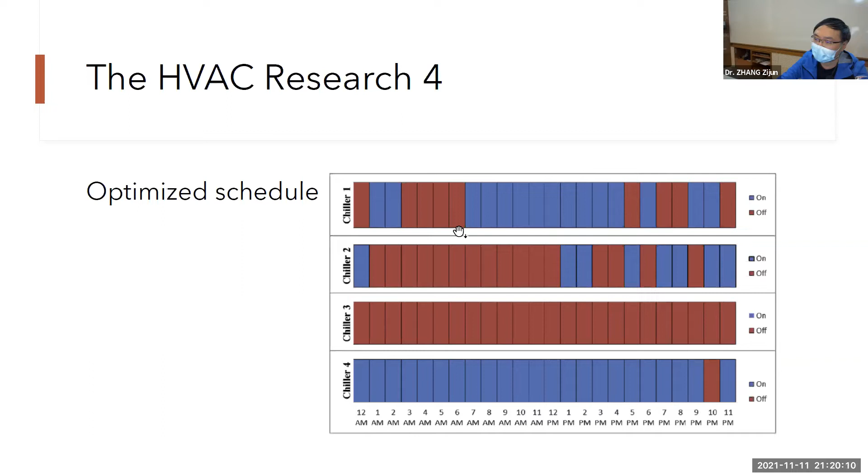This is the optimized result, a kind of operation planning of the 4 chillers. Blue indicates on and red indicates off. So it sounds like chiller 3 is never necessary to be turned on, and we will intend to operate more on the plants that have already been operated.

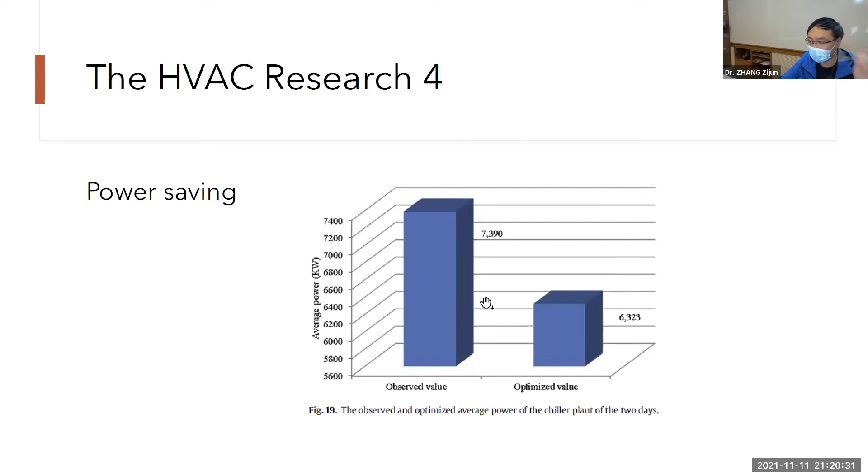What we would like to share here is that the data-driven model offers a new dimension for studying the dynamics of such complicated HVAC systems, and it offers a very nice approximation of the system performance. Based on such a data-driven model, we are able to explore more potential for energy saving via better and more dynamic optimal control of that system.

What else for the real implementation of such big data and AI techniques for HVAC systems? First, nowadays we need to consider the energy internet and energy system integration. For example, in previous studies we never considered buildings integrated with renewable energy systems, as well as electric vehicles. There are new characteristics in such energy supply and consumption scenarios.

Second, we want to turn energy saving into economic measures. So we need smart meters to measure the energy supply and consumption and their flows from time to time. We need cloud computational services to centralize the data and build data-driven models, which will serve as a backbone to be easily adapted into different applications. We also need real-time responses of the HVAC system operation for energy saving, and to touch on the interactions with the power grid.